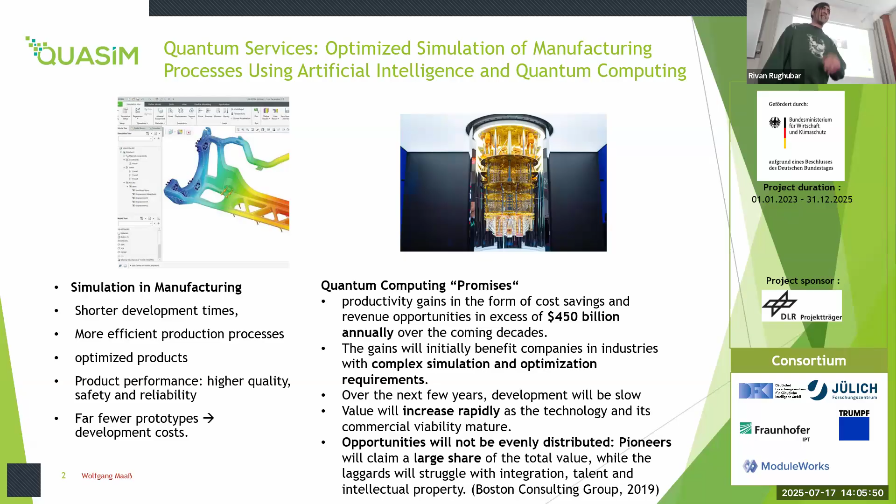So they promise we get productivity gains. We can do complex optimizations, and the value will increase rapidly. And this last point is how they get the money. They tell you you should invest now so you can be ahead of the game, so when it comes, you own it. One of the questions I get the most now is people asking me, should I invest in quantum computing? That's a very hard question. That's not what I'm covering now.

So the key questions for this project were: can we use quantum computing in simulations for industry purposes that make the task more efficient in principle? So maybe we can't implement it now, but if we had fault-tolerant quantum computers, would we be able to use those to actually help in manufacturing? And the second point is, do any of the NISQ algorithms we have now on NISQ devices actually offer an advantage or at least utility for manufacturing today?

So we had two approaches here, two different types of simulations. I'll show you in the next slide. One, we had a numerical finite element methods approach, so very robust physics, but very computationally intensive. And the second approach, this was more for the NISQ algorithm, was to use near-term parameterized circuits with classical machine learning and see if we can help the simulation in that way.

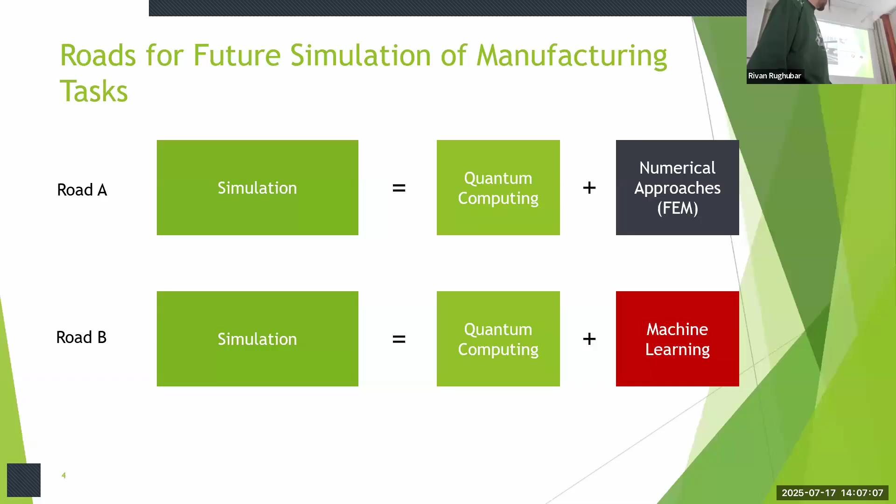So the first use case we had is laser cutting. We have these giant metal machines that cut out complex shapes of whatever you want really from these sheets of metal, so something like that up there. This is almost fully automated, but 1% of the time something gets stuck and you have to hit it with a hammer and it will start working again. But the company wants it to be fully automated.

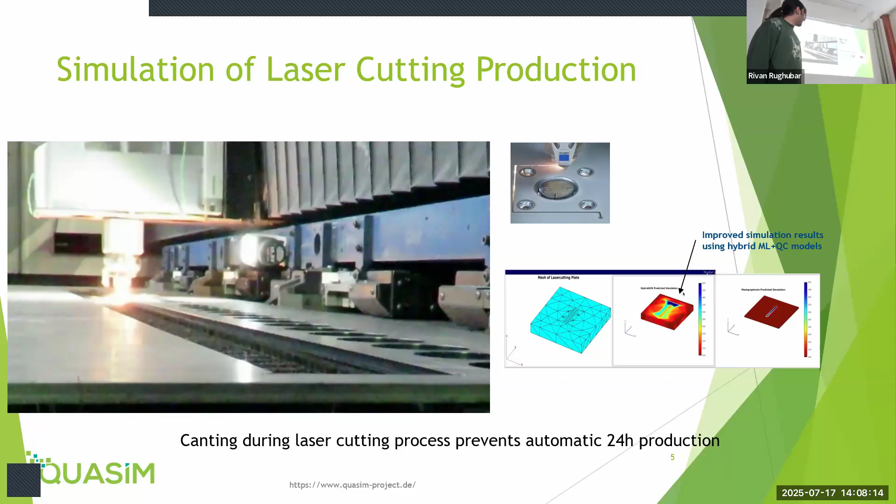So the task for the project was basically, if we give you a representation of what we want to cut out of the sheet, and we give you the path of the laser, can you model the heat of the object throughout the cutting process and see how it expands? And that causes the problem. Yeah, the thermal expansion causes it to get stuck. So if we can say it's going to get stuck before it gets stuck, then you know not to do it and maybe cut in a different way or do something differently. So that's the first use case.

And then the second one was for cutting these blades on jet engines. They're cut and water is sprayed for cooling and lubrication. But basically, these are really thin pieces of metal, and as you cut them, they vibrate. And if you hit the eigenfrequency, that's very bad because it can resonate and break. So the idea is we make a simulation of these blades, the different thicknesses and lengths, and we can work out the eigenfrequencies. And when you're doing the cutting, you can stay away from the eigenfrequencies and have a more stable system.

And what is a blisk? A blisk is the name of these boards. So it's like on the front of an airplane, the thing that's spinning and pulling the air in. Yeah. I also did not know. That's why they showed it to me.

So that's the industry side of the problem. Now we're gonna go through how we turn this into maths, and then into qubits, and then the next part, how we made quantum solutions to these problems and how well they actually worked.

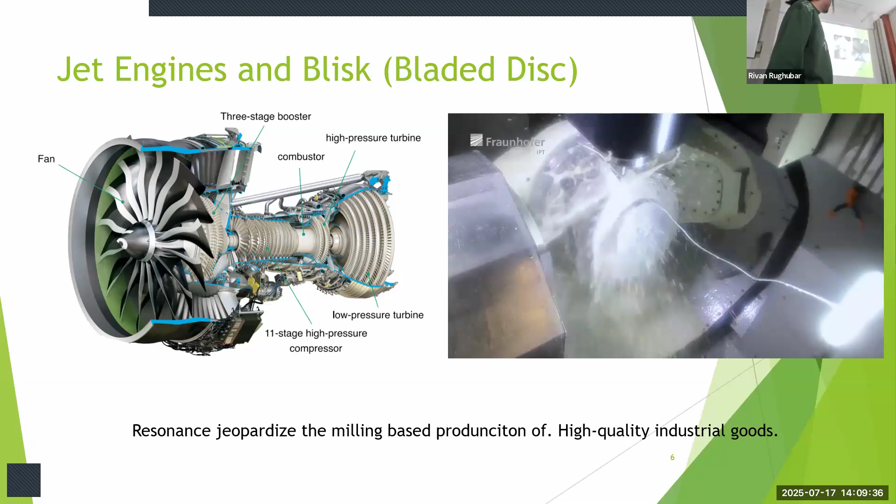Okay, here's a video of it. Sped up a little bit, but yeah, you can get an idea of how it spins and things. So for the simulation of the laser cutting, a lot of maths, don't have to worry about the specifics, but it's all here if you want to ask me later.

So yeah, the problem is if this thing expands too much, it will get stuck. And we can actually model this quite well mathematically already. So we can use finite element methods. So it's kind of almost modeling everything here like a spring and ball kind of thing. And we can do the thermal equations and we can calculate exactly how the heat will transfer if you give the density and the thermal expansion coefficients, etc.

The problem is this is very computationally expensive and very slow. So even on their big cluster computers that this company has, to do a small thing like this could take them 20 minutes to just work out less than 2 minutes of cutting time. So, you know, sometimes it's better if they just let the machine get stuck.

And so our part of the project was to say, can we make a quantum machine learning model that learns this expansion? So we feed it in some mesh and the path of the laser. And at every time step, we calculate the temperature of each node. And if it goes above a certain temperature, then we can say, okay, it's going to get stuck.

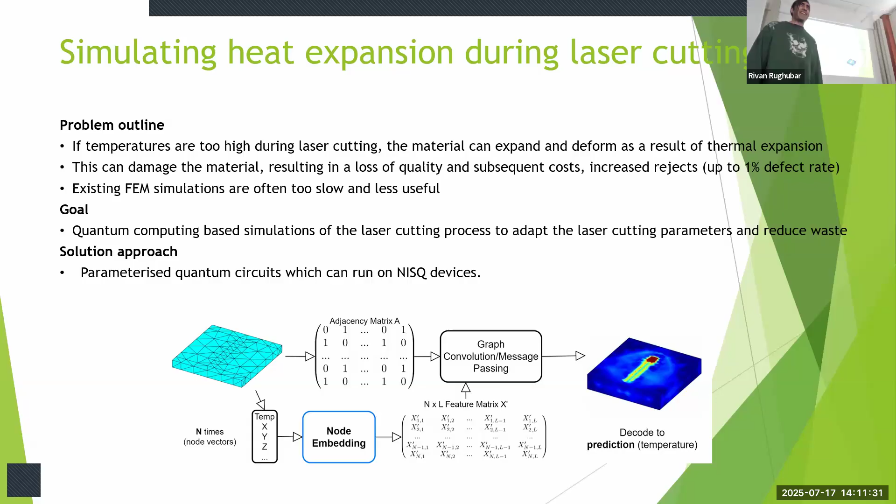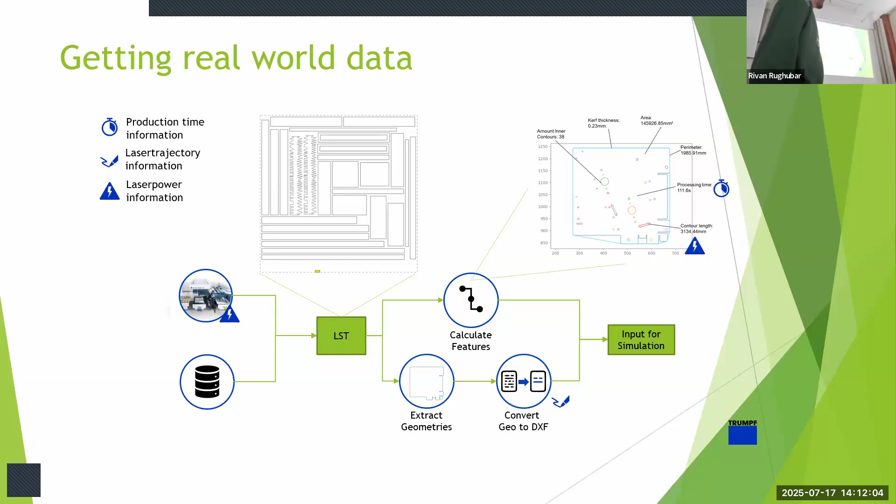So, okay, and this is how they extract the real world data into a simulation. So we have these things being cut out. They have a whole lot of sensors and things, and they can take all of that information and convert it into a mesh graph. They use MATLAB for most of that, so also can be quite slow, and lots of proprietary software that the businesses pay for. So they want to avoid all of that when possible.

So this is what our data set looks like. So on the right there, you can see what some object might look like. You can see it gets very complex in some parts where there's holes and things. Or this one's relatively simple. So this is one of the most basic data sets we had, where it's just got 3 time steps: at the start, when it's cold, the middle, and the end.

And then we had some of their actual consumer data. So objects they're actually cutting out on their machines, and that had 1,000 to 200,000 nodes per object. And you can imagine you have to update that for 2 minutes worth of time steps or whatever. It's a lot of data.

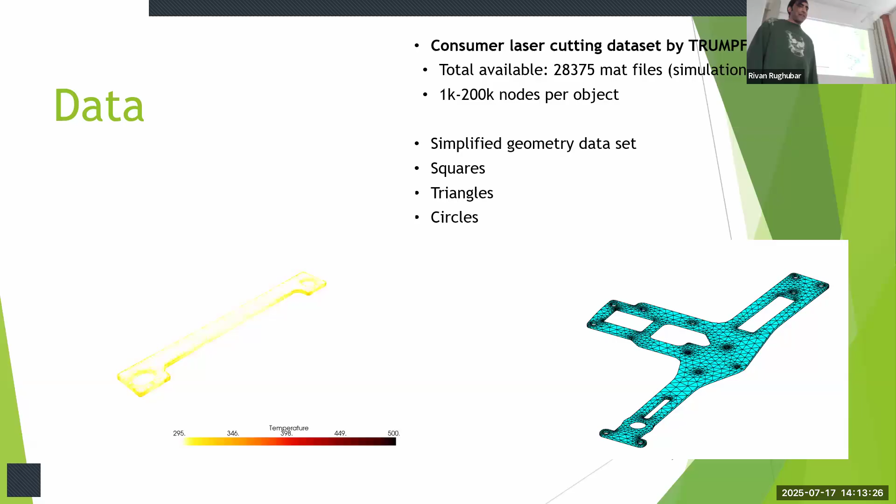And we made some simplified data sets because we also weren't allowed to share those with the public when we publish anything. So it's just squares, triangles, and circles of various sizes, but the same data structure. So the real bottleneck here is how do I get that into a quantum circuit? And that was our first challenge at least.

So here's kind of a visual approach of how we did it. So we pick one node on the graph, zoom in, and we pick one node as our central node, and we take the node and its neighbors. So in this case, we have 5, and we pass this into a quantum circuit. I'll get to that just now. So the first node is corresponding to the first qubit, and the neighboring nodes correspond to the following qubits in the circuit.

And okay, I don't have enough time to explain quantum machine learning, but this is what a very typical quantum machine learning circuit looks like. So we have this layer here, which encodes our classical data into the circuit. So in our case, it's just encoding the temperature of that node and its neighbors into 1 qubit each.

Over here is all our parameters, how the qubits entangle with each other. It works very similarly to how parameters work in classical machine learning. And then we measure just the first qubit, and that measurement will correspond to a temperature.

And so what we're asking is, for this node and its neighbors at these temperatures, what will the temperature at the next time step be for this node? So this kind of works, but one problem you might be able to see immediately is, what if the number of neighbors changes? Then do I have to train a whole new circuit for that? What if the ordering of the neighbors changes? Or does it matter? So we have to do things like that.

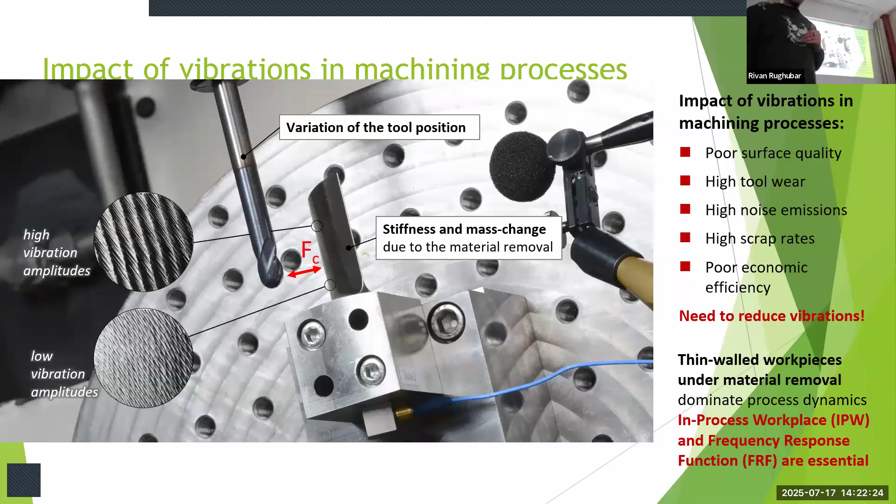And then the second problem was the milling. So just another slide to remind you of the problem. So we're drilling and cutting into these blades, and we don't want it to vibrate at the eigenfrequency. So there's a whole lot of maths that they use currently. This is how they currently calculate it.

So they make mesh representations of each of these blades. So this would be like a ball and spring kind of simulation. Is it finite elements? Yes, finite element methods. And they run a whole lot of these simulations, and then they work out the eigenfrequencies. I'll show you how that looks on another slide.

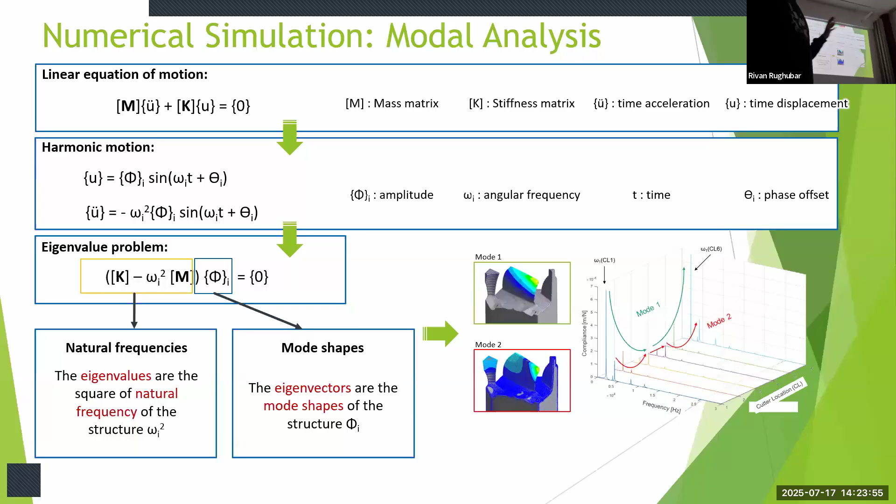And this model can tell us these modes that you can see here, and the modes tell you what the eigenfrequency is. And so the idea here, this work is one of my colleagues' work, so I can tell you details, but I might be missing one or two small things.

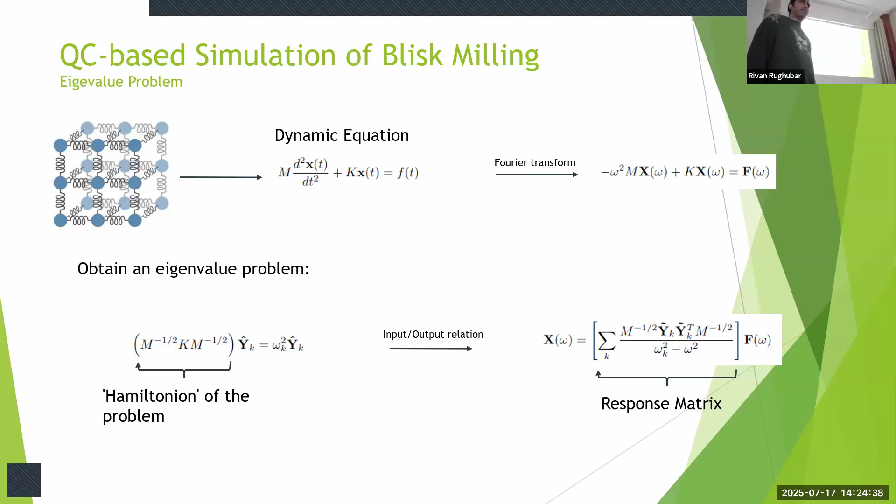So we can turn it into this eigenvalue problem and get this response matrix. So we're turning a dynamic equation, which is the position as a function of time, and we use a Fourier transform, and now we have the force as a function of frequency. And then we can reduce it to an eigenvalue problem, get this response matrix and calculate that. But for hundreds of thousands of springs and balls, that matrix can be very large and very complex.

So for this one, we had a fault tolerant approach. Basically, we take the stiffness and mass matrix, we make one new matrix out of them, and we encode this into a circuit. And the basic idea here is you can do a quantum Fourier transform. You set the circuit up right, which decodes the problem, and at the reading of the circuit, we get the eigenvalues, which correspond to the eigenfrequencies of that problem. So the output of the circuit is going to give you the frequencies which you should stay away from in your manufacturing.

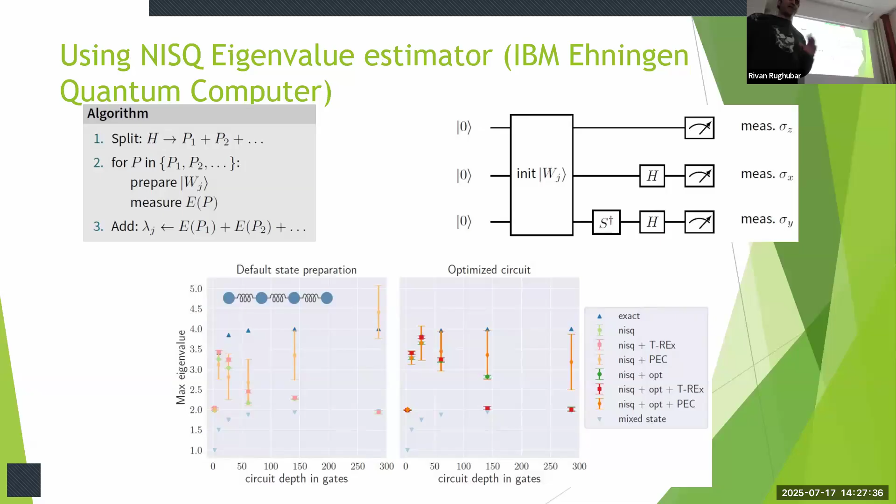And as you can see, as you go deeper in the circuit, the solutions get closer and closer to maximal noise, which is expected but disappointing. And at shorter circuit depths, there is sometimes overlap with the ideal solution, like this one up here, but with quite large error bars. So all this to say, it can work, but the hardware is not there for us yet to make it work.

So these are our main challenges for actually using quantum computing in industry. We've got the algorithms themselves, which don't exist yet or are not very optimized, so people like us have to make better ones. Not necessarily just for industry, but we make generalized algorithms, and we can apply them to things like this. Our quantum hardware is lacking at this point. It's improving at a decent rate, but we're still a while away from having it in industrial use cases at least.

The scalability, so how large a system we can have. So even if we have a 100 qubit system, that's still maybe not enough compared to a supercomputing cluster.

And that's just going to also take time before we can use these algorithms on a large scale. Integrating it with current systems: so we can do all this, but then if I take this model to the company, like, okay, how do we run this? How do we plug this into what we're already doing? And that's a big challenge, and there's companies that specialize in that, and it takes them 10 years before they can implement something into a company that's large scale like this.

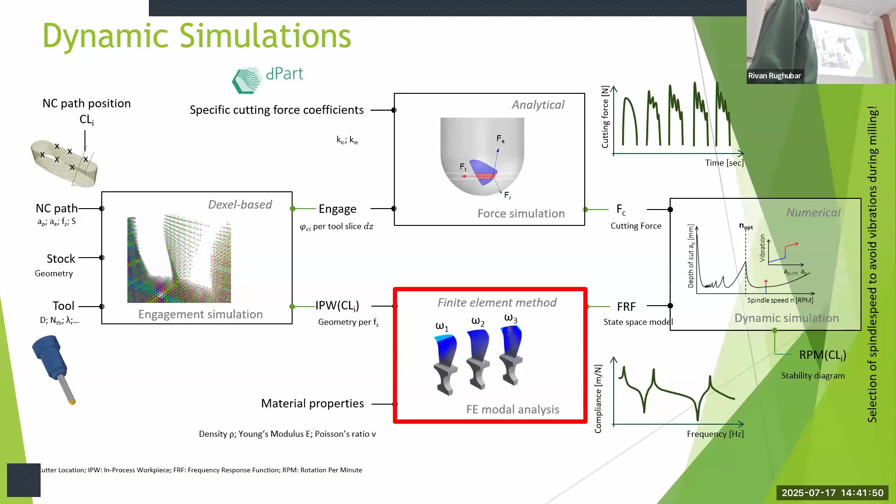So it basically said the entangling isn't adding anything. Oh, you got the same result? Well, we have better results, three times better. Is it a little bit like, without the RZ, it's the Euler method, and with RZ, it becomes Runge-Kutta? Exactly, kind of. Okay, that's very interesting to explore. But essentially, we expect that entanglement should make your model better.

It should, but that's why I say it's very problem specific. For this problem we didn't, and we know exactly where these numbers came from. We calculate them with the finite element method, so there's nothing hidden in the quantumness of it that we can't see. Because I remember Maria Schuld also mentioned they had entanglement and didn't see any significant change. Exactly. That's a good sanity check: once you've trained your circuit, remove the entanglement gates and see if the output changes. It depends. We didn't do that direct experiment.